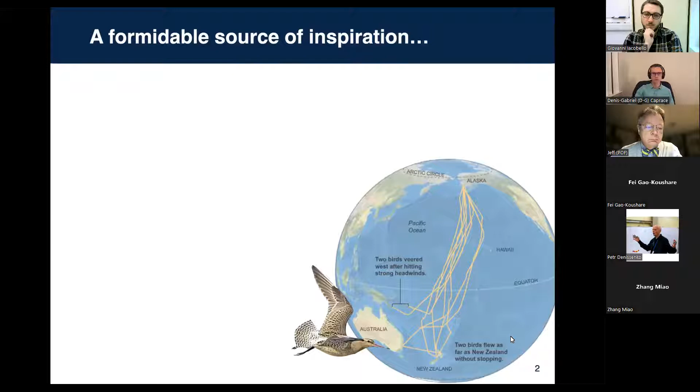Let me start with a very broad introduction, but I just want to point out how amazing nature can be, and how inspirational it can be for us as engineers when we try to come up with solutions. I'll point out a couple of facts here, like this little guy, the bar-tailed godwit, is one of the birds we know travels the longest distance, basically traveling across the entire Pacific Ocean on a single flight. It's pretty amazing in terms of flight performance. And you have other kinds of birds that do similar journeys, very long distances, like certain types of terns, and then swallows who can fly for an extended period of time, months, without ever landing. So all those things, when you look at that, it's really just amazing and mind-blowing how that can happen, and it's a great source of inspiration.

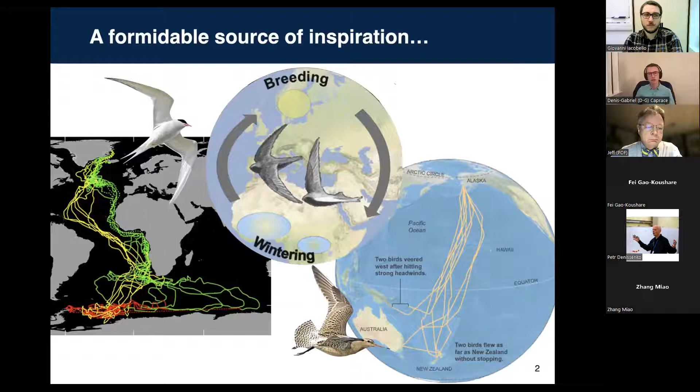Now, one of the consistent behaviors that we observe with birds is formation flight. Here we're talking about this organized way of flying where the birds fly in these V-shaped formations. That's been always kind of a source of wonder. So why do they do that? There's been many theories involved, but one of the theories that prevailed eventually was that they are getting an aerodynamic benefit by flying in this V-shaped formation. So we're going to look into that, but that's one of the things we think motivates formation flight for birds.

So it's been, of course, the topic of studies for a long time, first of all theoretical studies. I'm putting a list here, a very short list, just to give you an idea of the dates we're talking about. So early studies began at the beginning of the last century, but it's not until the 80s that we really get an idea of how much those birds can save energy when they're involved in formation flight. So here I'm borrowing this figure from Hummel in 1983. What he did is use very conventional aerodynamic tools, textbooks, theories, and also many assumptions - like in this study, it considers steady wings, so it's not even considering flapping flight or whatever. But he was able to come up with this measure of how much power the birds save when they're in formation, as a function of the lateral spacing between the birds.

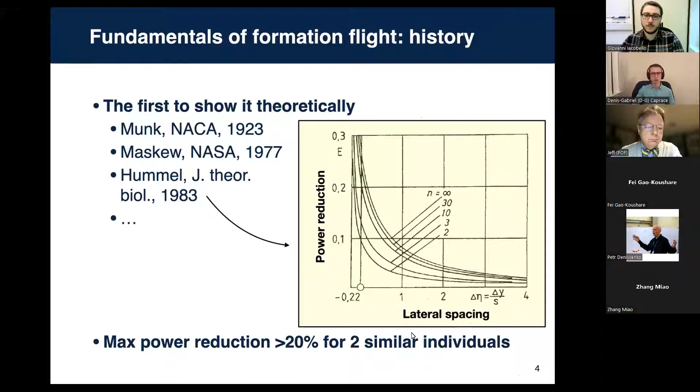To understand really where this power benefit comes from, it's way easier to look at a steady wing that flies at a certain velocity, and just because of Newton's third law, what you will eventually have is wake vortices developing behind the wing.

That's something you can visualize quite easily on an airplane, which has contrails here.

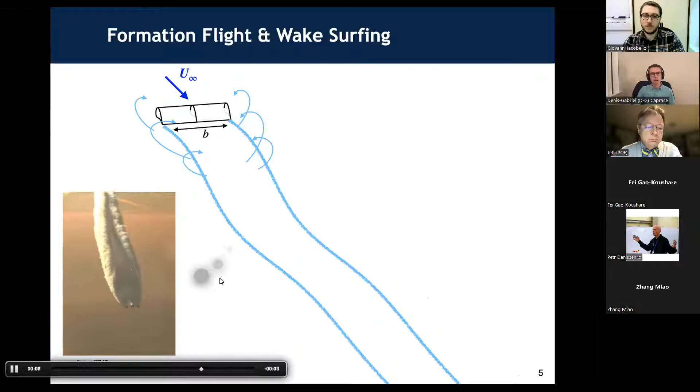What those vortices do is induce a velocity on their surroundings, with an upwash component outboard of the vortices and a downwash component inboard of the vortices.

What formation flight is about is really just flying into this region where you have upwash, and you can see that you have higher upwash velocity closer to the vortices. You can surf that region and get benefits from those upwash velocities.

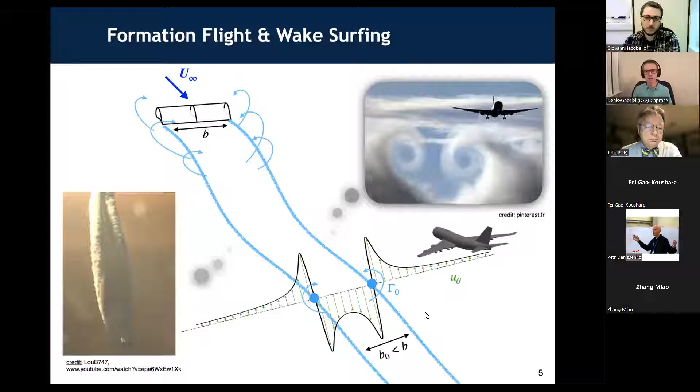What happens is, if you first consider an isolated airplane that travels at a certain velocity, you have a relative velocity to the air.

You can decompose the forces on the wing into lift and drag. But if you have an upwash velocity, you're changing that relative velocity a little bit, and the result is that you're tilting this system, so the lift vector is tilted forward.

So if you compare the two cases, when you fly in an upwash, the lift is tilted forward, and there is a slight thrust component to it.

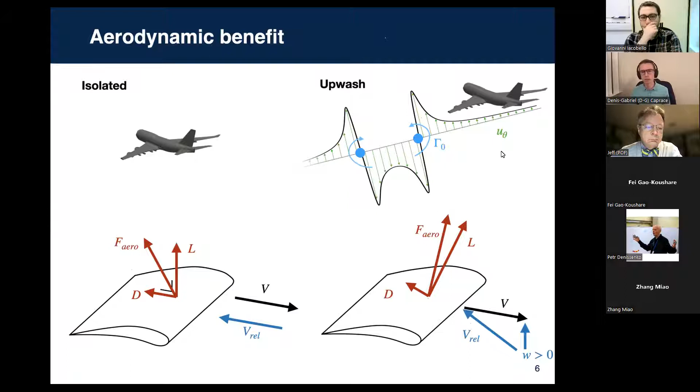That's all about formation flight. It's actually maybe not producing thrust, but reducing induced drag through the presence of upwash velocity.

So we know about the theory and how much theoretically could be saved, but then you can also just go fly and verify that number, seeing how much we can save with actual airplanes.

That's been the topic of numerous flight test campaigns, starting in the 90s, again with Hummel.

He wanted to verify the number he got with theory, and you can see he obtained about 10% savings during this experiment, pretty close to what he was expecting.

Then NASA did several experiments, starting with fighter jets, and you can see they reached pretty high values of savings, because they're really going into that region where you have overlap between the tips of the wings, as you can see here.

That's what gets you to very high saving values.

Another, in my opinion, quite interesting study was a more recent one where they used business jets, and one focus there was to try to understand

how turbulence affects the smoothness of the ride, meaning you don't want passengers in the airplane at the back to have too bumpy a flight.

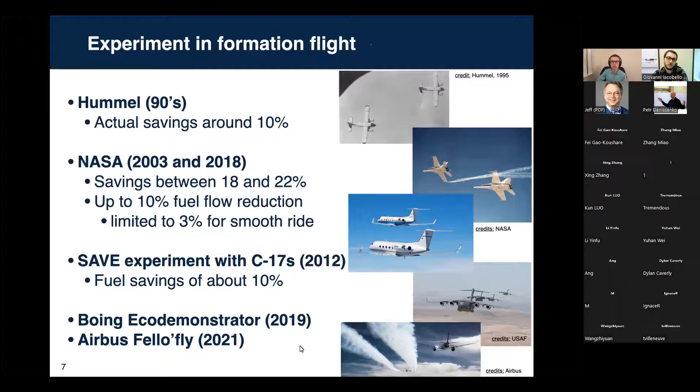So it's pretty good to see, and it's also pretty understandable when you consider the state of air traffic today, and in perspective with the current climate crisis, of course.

We're talking about 10% savings in drag, but that would also translate into fuel savings and reduced emissions.

When you look at certain regions of the airspace, like over the Atlantic Ocean, you have all those airplanes traveling roughly in the same direction, and it's pretty obvious to imagine a way.

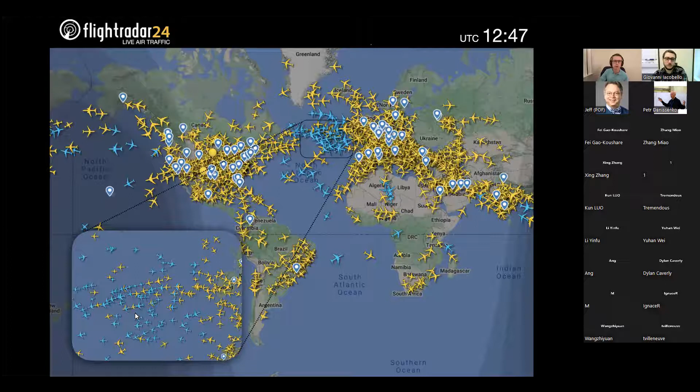I wouldn't say obvious, but you can imagine that it could be done, to group those airplanes in such a way that they can perform formation flight and get those benefits.

But there are still challenges that need to be overcome if we want to be able to really fly airplanes in formation. And the biggest one, of course, is safety. You want to maintain and make sure that both airplanes are safe at all times during formation flight.

One of the first things you realize is that you're not going to be allowed to fly those airplanes in what we call close formation flight, where you have one airplane and right behind it, a couple of wingspans behind, the second airplane, because the risk of collision is too high. What's more likely to happen is that you're going to fly extended formation flight, which involves a streamwise distance between the airplanes on the order of 50 wingspans. So we're talking about a couple of miles in spacing.

Now at those distances, you actually need to have a better idea where the vortices are located. And that's for two reasons. First, they're not visible at all times with contrails, so there can be situations with no contrails.

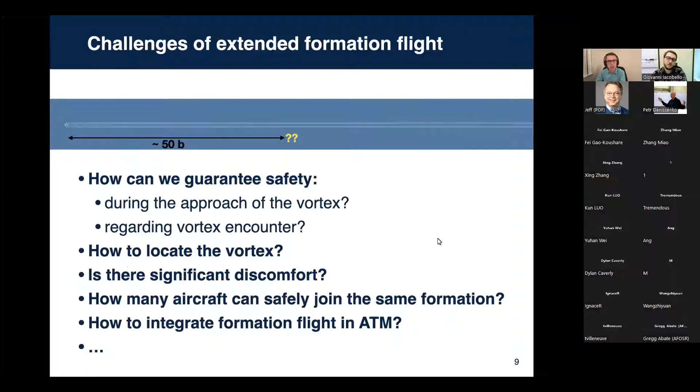There's a list of other challenges, but really we focus on wake sensing and locating the vortices here. So what I want to do in this presentation is go over a couple of the tools we developed in order to do that wake sensing, and then we'll go over some results.

I'll try to show you how the filter performs and what are the advantages and maybe limitations of those filters that we developed, and then I'll circle back to the aerodynamics of birds, because I want to compare that to what we have seen for airplanes. So let's start with the tools and modeling capabilities that we developed.

Just to make it clear, what we're trying to do here is determine the relative position between the follower airplane and the leader, and the position of the wake of the leader. I'm going to be talking about the leader when I refer to the airplane in the front, and the follower is the airplane at the back. You can see there is this quite long distance between these two airplanes.

So we're looking into those two quantities here. The thing is, there can be some factors that will influence the motion and the position of the vortices when we're talking about long distances like those. Those factors can be things like turbulence, but also interaction between the turbulence and the vortices, which can then develop fundamental instabilities that affect the position of the vortices over time.

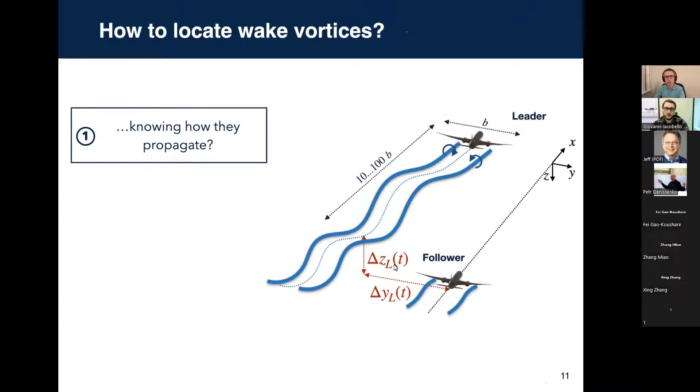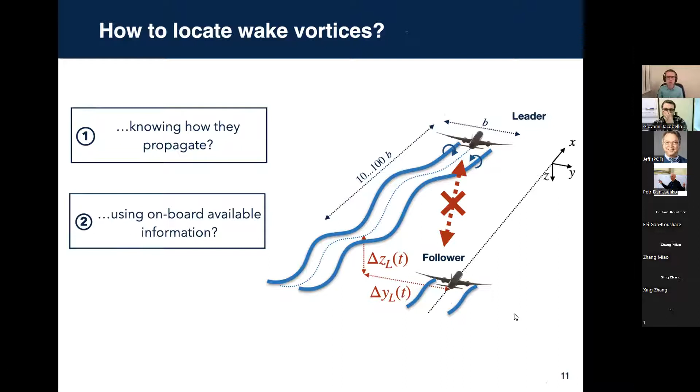That leads to a certain uncertainty, and that's why we think estimation can be a solution to better mitigate that uncertainty. Ideally, that's what we call wake sensing: the determination of those quantities. And ideally we'd like to do that without any communication between the airplanes, just because if you want to implement formation flight as soon as possible, you'd like to limit the number of additional systems you need on the airplane to perform formation flight.

But then when you know the relative distance between you and the wake, as the follower you can turn on what we call the tracking. That means using your autopilot to fly constantly at the optimal position in the wake that gets you the maximum benefits you expect from the wake vortices. So we're going to talk about sensing when we try to determine the position of the vortices, and then tracking when we actually fly using those estimates in order to maximize the benefits of formation flight.

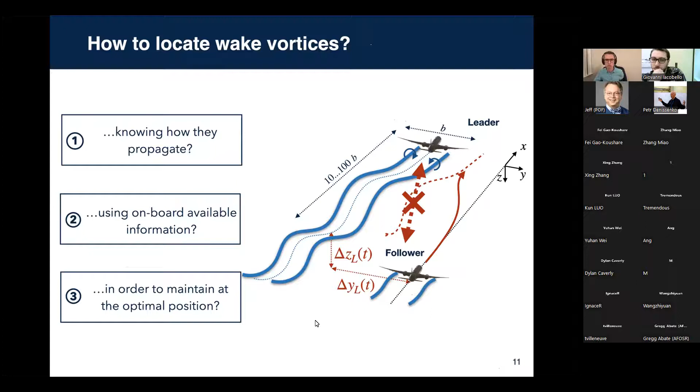So we're trying to sense the wake. Then the question is, what sensors do you need for that? One thing you can think of straight away is using relative position, and that works pretty well when the airplanes are in close formation flight, close apart from each other. But because of that uncertainty in the propagation of the wake that I was talking about, it lends itself a little worse for extended formation flight.

That's something we will not consider in this work. Another idea is to measure the vortices directly, which you can do through LiDARs, for instance. There have been works in the literature with that, but again, that requires an additional system. And if you want to install that on an airplane, you get into certifications and things like that, so it will probably take some time before airplanes are equipped with that system.

For that reason, we're not looking into that. Instead, what we're going to be seeing in this work is the last two options. The third one still uses an additional system, but takes less volume from the plane, let's say. That would be using some sort of distributed measurements across the wing. Instead of sampling an entire 2D section of the flow, you can have a couple of probes that give you an idea of the state of the flow around you, and from there you can determine the position of the vortices. That idea has been used previously in similar studies.

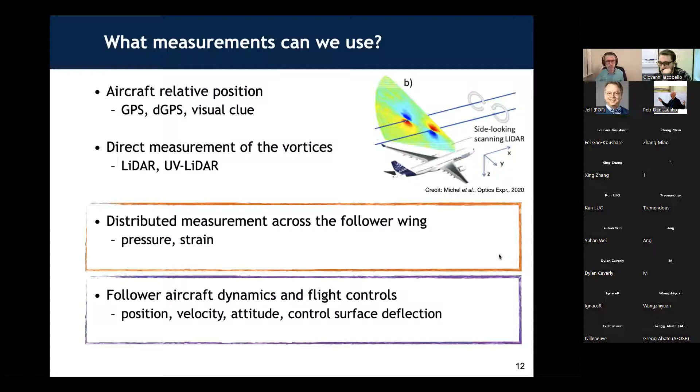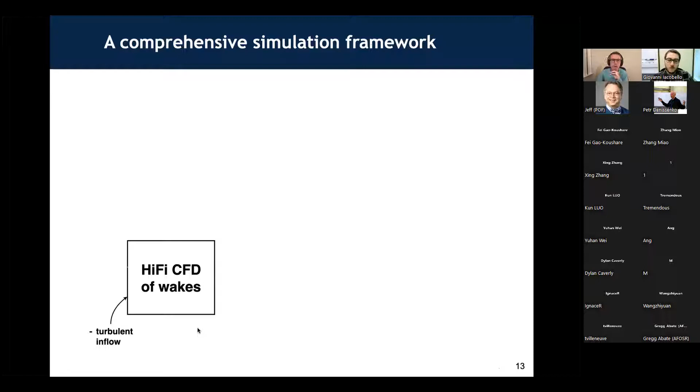We'll need a simulation environment to perform those investigations. Let me go over the main pieces we need. We'll have a high fidelity CFD solver, which is one of the main building blocks of this environment, because we want to capture the physics of those wakes. As I mentioned, you can have interactions between turbulence and the vortices, and we really wanted to have that kind of fidelity to make sure the propagation of the wake is accurate, with turbulence as a source of perturbation and noise in the estimation.

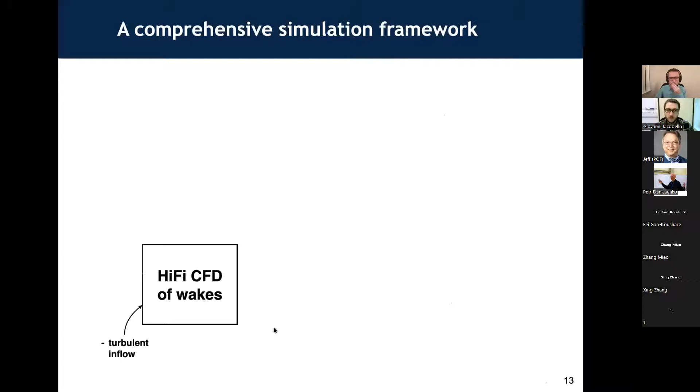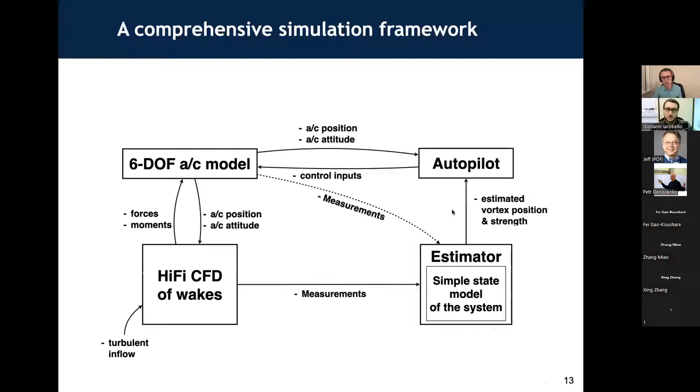Now the CFD is coupled to aircraft models. Those are 6 degrees of freedom models, which basically allow us to integrate the position of the airplanes as a function of time. From those bricks, we take measurements. The whole idea of the estimation strategy is taking measurements out of those two, feeding that into an estimator that we still have to determine and define, and then you hope that out of that estimator you can get the position of the vortices and their strength. That's about sensing, and then for tracking, you can feed that back into an autopilot that will control the airplane and make sure the follower stays constantly in the right spot.

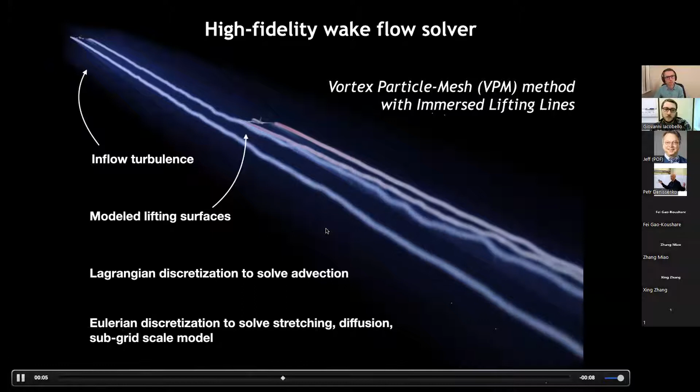Then you have the aircraft model. It's again a 6 degrees of freedom model, meaning we can have the full dynamics of the airplane. We have control surfaces, an autopilot, and all that is integrated into the high fidelity CFD solver.

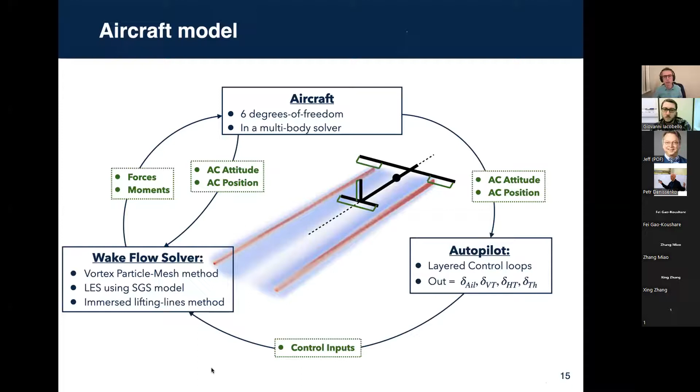Now comes the cornerstone of this estimation, which is the estimator itself. Before I go into this, I'd like to mention there are several ways of attaining that goal of determining the position of the vortices, or at least finding the right spot in the wake where you want to be in order to maximize the benefits. Another thing you can think of is deep learning - you could teach an aircraft how to fly into a wake. That's something I won't talk about today, but I have a couple of backup slides if someone is interested.

The advantage here of the estimation based on estimation theory and Kalman filters is that you will estimate the position of the vortices, but you will also have a degree of confidence in that estimate. And we think that is really an advantage with respect to safety. So the way it works is as follows.

Just a refresher on Kalman filters in general. You have an actual system that you can take measurements out of. Those measurements are this Z vector here. They come from an actual airplane, or in this case, from the CFD and the high fidelity aircraft model. They come into the Kalman filter, where I have a state vector and a state representation of the system through a surrogate model.

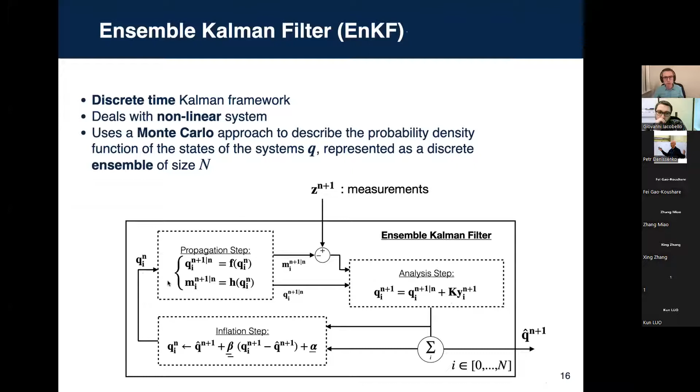So now we know about the estimator. What we still need to determine is what we put in this box - what's going to be the surrogate model we use. The surrogate model should rather be something quite simple and also computationally efficient, because if you want to do real-time sensing, you need to be able to propagate that model often, in a real configuration.

This model here is based on the Prandtl lifting line for the aerodynamics. So we have a couple of lines that represent wings, and they are influenced by two infinite vortices - actually regularized point vortices - but those vortices have an induced velocity similar to the actual wake.

And so they influence the aerodynamics of the Prandtl lifting lines. And then on top of that, we still have our dynamics - the 6 degree of freedom dynamics of the airplane that we can integrate, and the autopilot. So that's the surrogate model.

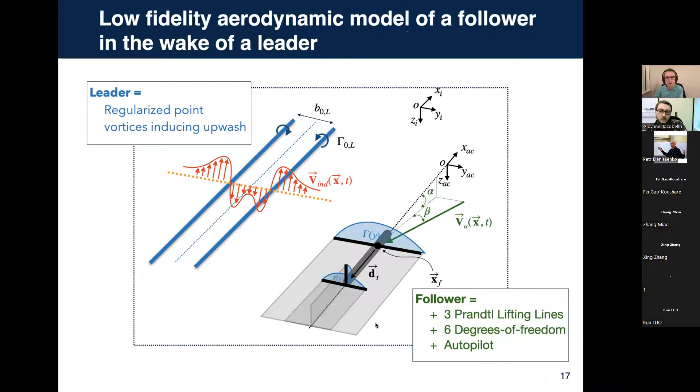I can skip that probably. I just want to summarize here the entire strategy. So we start with the actual system, which is what I presented in the beginning. It has the CFD simulation. It has the aircraft dynamics through the 6 degree of freedom model and the autopilot. That is what we hope we could swap with actual airplanes flying in reality.

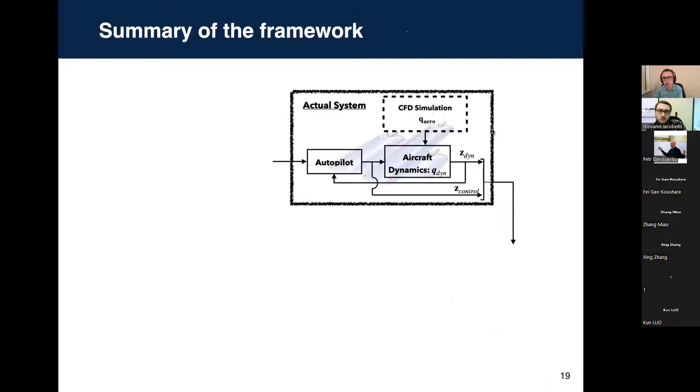But in this context, we take measurements out of that and input that into the Ensemble Kalman filter. The Ensemble Kalman filter has this surrogate model in there, and it performs the estimation, so that in the end we have an estimate for the position of the vortices, the relative position, and their strength. And then eventually, as I was saying, when you do tracking, you can feed that back into the system and provide that information to autopilots in order to follow the wake vortices.

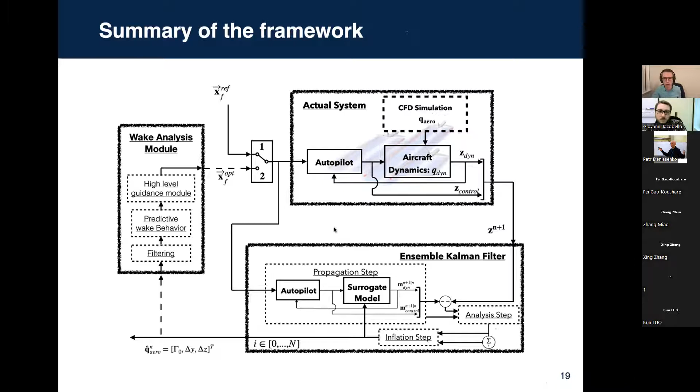Okay, that's it for the modeling. Now what I want to do is show some results, and we'll do it gradually. I'll start with very simple configurations and simple systems, and then I'll add more complexity towards the end.

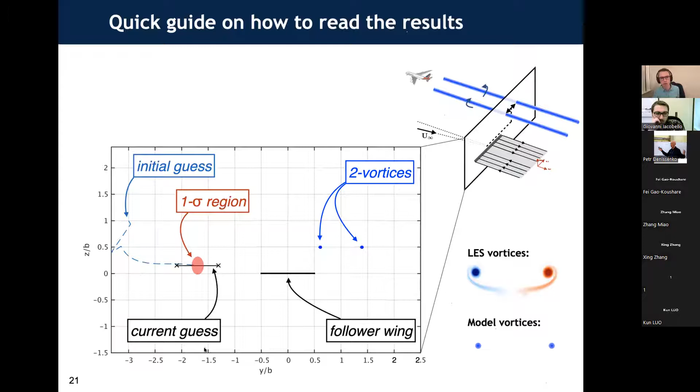On the left-hand side here, it's everything related to the current state of the filter. You have the current guess for the position of the vortices, materialized with the two crosses here. You have the history of the estimated position. And then the red area is the confidence interval that the Kalman filter provides. Basically, the smaller that region is, the more confident you are in the estimation you're currently doing.

So let's start with something very simple. We're going to look at a follower airplane that actually has no dynamics. I turned off the autopilot, turned off the dynamics. I'm just fixing the position of that airplane in space. It's located right next to the vortices that it's trying to locate. And I'm using for this one those distributed measurements across the wing, which give me a sense of the state of the flow around me. That's the only measurement I'm using here.

So if I turn it on, you can see that the filter actually works. It converges to the position of the vortices, which is great. Now, that's not really new. That has been shown in the literature before that it can work.

Now, what's novel here is the use of the Ensemble Kalman filter. And I was talking about nonlinearity and robustness. What happens is that I can put my initial guess for the system pretty much anywhere in that 2D space, and the solution will converge to the actual solution. That was not the case, for example, in previous studies that used different types of filters.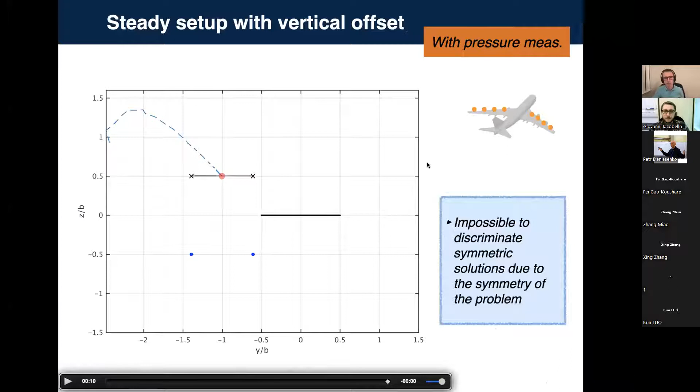So that's going to cause an issue here. And so we can try and solve that issue.

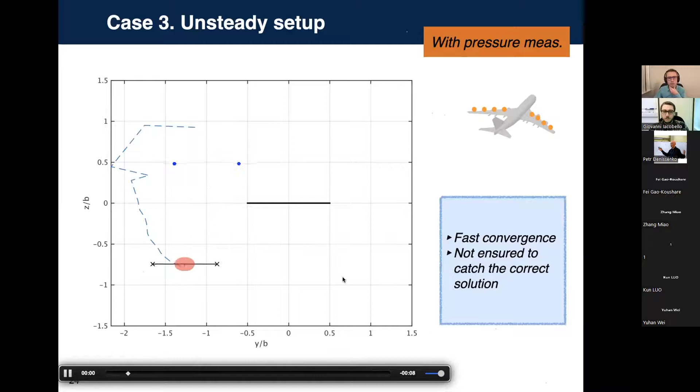One idea that there was in the literature is that if you add unsteadiness in the signal that you're trying to estimate, you're improving observability. That's actually the case here because the filter converges pretty fast to a solution, but still here, because of that symmetry, you're not able to guarantee that the solution converges to the actual solution that you look for.

Another idea that we had here is that if you add dynamics now on the follower airplane, you might also help the estimation. And that is because if, let's say I am converging to the wrong solution, then if the follower moves a little bit, it will get closer to one solution and further away from the other solution. At some point, the filter will realize something is wrong and it will switch to the actual solution. And that's exactly what just happened here, if you paid attention. So by moving the follower a little bit, I was able to converge to the actual solution. So there is this idea that the dynamics of the follower airplane itself can help in improving the quality of the estimation.

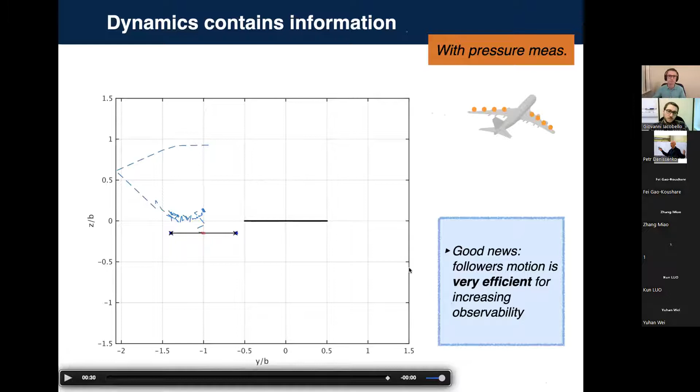Now, unfortunately, there's no free lunch. And if you really want to make sure that you get rid of that symmetry issue I was mentioning, you will have to add a new measurement. Just to make it clear, what happened here was that if you have vortices located somewhere in space, they will have an influence on the main wing of the follower, but that influence is going to be the same no matter if it's located above or under the plane at the same distance from the symmetry plane.

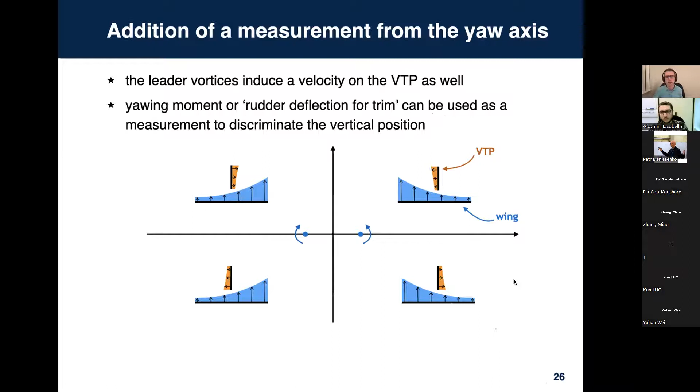Now, if I add another measurement, let's say using something that happens with the vertical tailplane, and that could be a yawing moment, for example, or the deflection of the rudder, or something that has to do with the lateral dynamics of the airplane, then what I'm getting is a different configuration in each quadrant of the space here. So that now means that if I add this measurement, I should be able to discriminate those solutions and make sure that I'm getting the right solution.

And so if you do that, actually, yes, it works. You can see that the estimation gets to the right solution and gets locked onto it. What happens here is that I turned on both a simplified dynamics of the follower, so you can see that the follower wing responds to the presence of the vortices, which helps the estimation. But also I have this additional yaw measurement that I'm using to discriminate between the solutions, and then I'm getting a correct estimate over time.

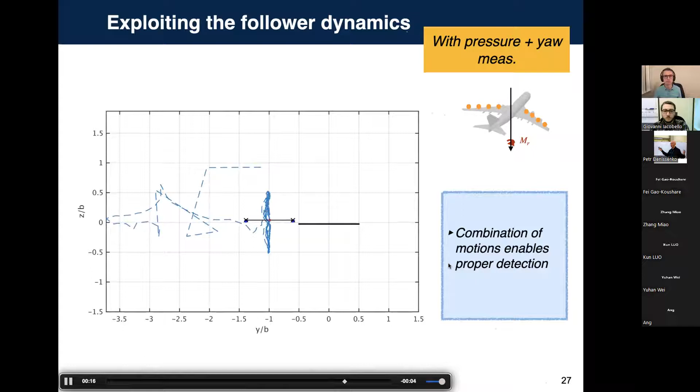So those were relatively simple cases, but they were all using additional sensors distributed over the wing. The big question we had is: can we use only the dynamics of the airplane, meaning only measurements that you already take on the airplane, in order to perform the estimation?

And that's what we're using on this slide here. It's actually a jump in complexity, not only because we're using those dynamics measurements, measurements from the dynamics, so position, velocity, also angle of attack, side slip, and the control surface deflections.

In this case, the dynamics of the follower airplane is of course turned on because I want to take measurements out of it. But we also have the autopilot, which for this case controls the airplane so that it flies in a straight line. That's why you can almost not see it moving here.

And the flickering at the back, if you can see it, is actually the turbulence that we have in the simulation. That's a natural source of noise for the entire estimation process, because it generates those instabilities that we saw in the wake of the leader.

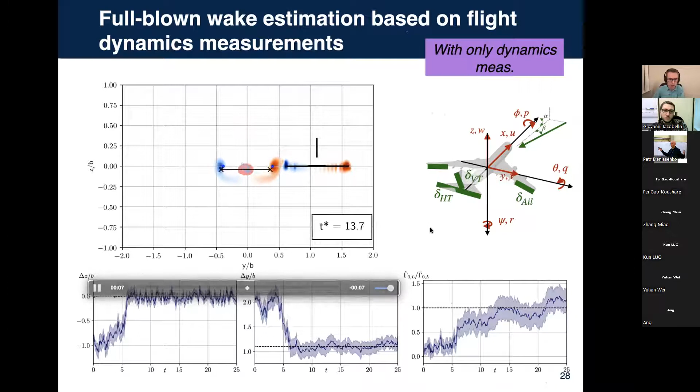Now that was sensing, and the last thing I can do is turn on the tracking. So if I have vortices that are moving, then I can instruct the plane to follow those vortices and use the autopilot for that. That's what this little video is showing.

And actually, in this case, it also helps the filter because, again, you have dynamics going on with the follower, which improves the observability, and also you stay closer to the vortices at all times, which helps you have a higher confidence in the estimate at all times.

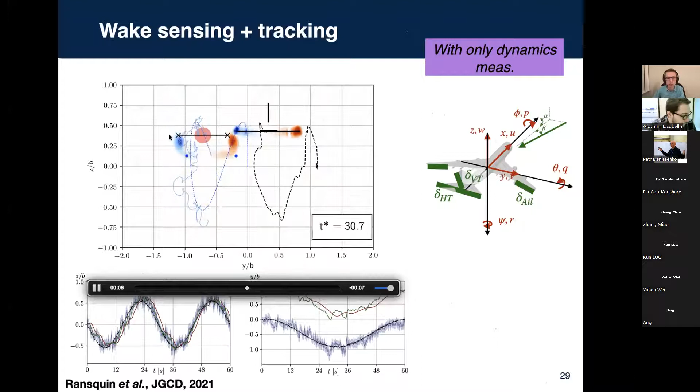So let me now share some of the lessons we learned in this entire process, and that was, let's say, a learning process for us at least.

So there was this ambiguity in the position of the vortices, and due to that symmetry I was mentioning before, there's another kind of symmetry in the system, which I didn't mention so far: if you have a strong wake located far away from the follower, it actually has a very similar influence on the follower as a weaker wake that would be closer. So you have that trade between the lateral position of the wake with respect to the follower aircraft and the circulation of the wake vortices.

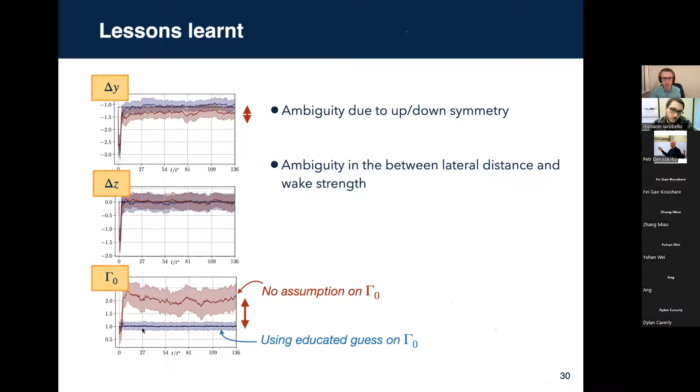So that means that practically, if you want to implement this solution in actual airplanes, you would need some sort of way to determine what this circulation can be. That could either be through communication between airplanes, so you would still need that, or maybe just a gross estimation or an educated guess of the mass of the airplane by looking up its type, for example, might be enough to have that little information we're missing in order to make sure the estimation does the right thing.

And the last item here I want to mention, which is one of the limitations of the filter, is that the surrogate model we use inside the Kalman filter needs to be relatively accurate in reproducing the natural dynamics of the follower airplane.

And that is because, when we use only the dynamics as measurements, what the filter is actually doing is discriminating between what is the natural dynamics of the airplane without influence of the vortices, and what part of the observed dynamics is due to the wake vortices. So if you have biases and noise in the surrogate model, then the filter might not be able to identify what is the influence of the vortices.

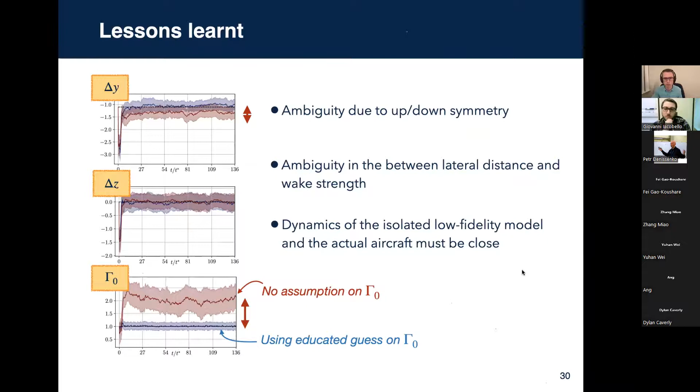So that's all about wake sensing and tracking. Let me now conclude by briefly showing you the wakes of birds.

The question you can ask after seeing all this for airplanes is: birds have been doing that forever, so how do they do it? Do they need that kind of sensing? How are they able to fly in formation?

The first thing to realize is that the wake of a bird is slightly different from the wake of an airplane, in that you're going to have vortices, but they're not going to be straight vortices as in the case of the airplane.

Instead, what you get is oscillations and variation in circulation depending on the position, because the bird is flapping. There was also a theory that depending on the gait of the bird, how the wings are flapping, you can have a wake made of vortex rings or something more continuous.

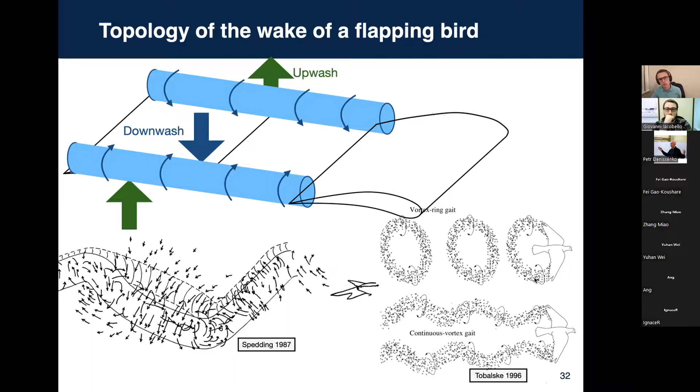So the idea is that we can use that CFD simulation tool I mentioned to study that and perform a simulation of a bird to see what the wake looks like. That's actually the work of my colleague Victor for his thesis, and he got to this solution, a simulation of a bird.

There's actually a lot that goes into this, because the aerodynamics is through the CFD tool I presented, but then there is also a quite complex biomechanical model of the bird that includes the bones, muscles, tendons, and all that kind of stuff.

Also something interesting here is that the bird is actually in trimmed condition on average, meaning the lift equals the weight and the thrust equals the drag on average. So there was a lot of effort going into controlling that bird and stabilizing it in the simulation.

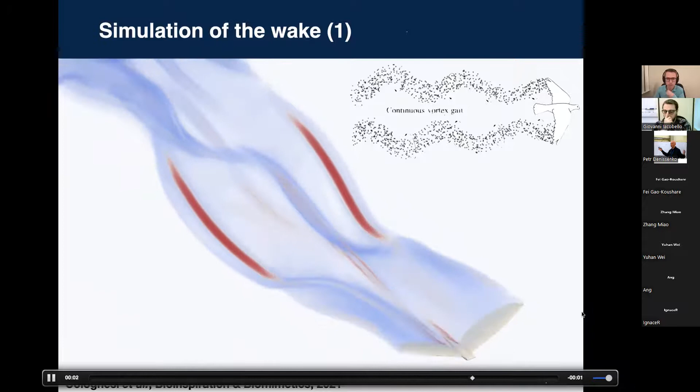I have references about the models involved, and I can show those at the end.

But then when you have that wake, you can compare it to what you know from airplanes, and you can see that there are regions of the wake that look like what you'd expect, with strong tip vortices, corresponding to the moments when the bird was producing most of its lift. But there are also other regions that look a little different.

Now, the good thing about this simulation is we believe it's physically correct, in the sense that the vorticity field is still solenoidal, so all the loops in vorticity are closed. Now we can use this wake for more investigations, and one of them can be formation flight.

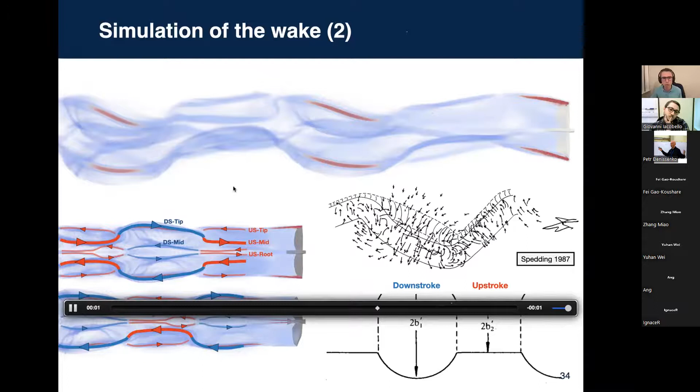I just want to show you this, which is interesting in the sense that now you have two birds. The bird at the back is again flying in trimmed conditions, at equilibrium, and you can see it's flapping its wings in phase, meaning that if you look at the tip of its wing, the tip is actually following the path of the tip vortex of the bird in front — and that has been shown to actually happen in nature.

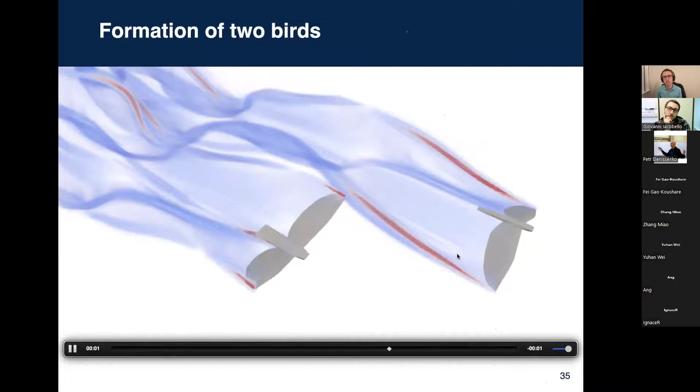Some species of birds know that doing so, and adapting their flapping frequency and phase to the vortices coming out of the leader, will maximize the aerodynamic benefits. So they have to have a way of sensing the wake in order to adapt.

But what I want to point out here, in terms of sensing, is that this configuration has all the factors I mentioned were beneficial for sensing. We have a lot of unsteadiness and three-dimensionality in the wake of the leader, which has been shown to improve the observability of the wake, and also the follower bird has its own dynamics — those two factors may help in sensing.

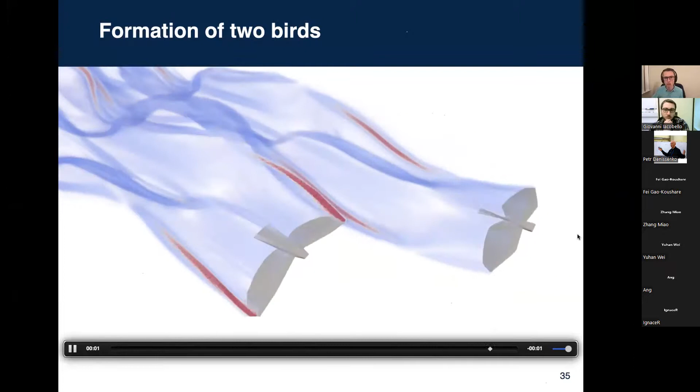And also, they're flying in close formation, so they can most likely use their vision to position themselves.

So if you're interested in those results, I invite you to look into publications. This one is not published work yet, but look up the work from Victor and follow him on ResearchGate, or if you want to get updates, look for that.

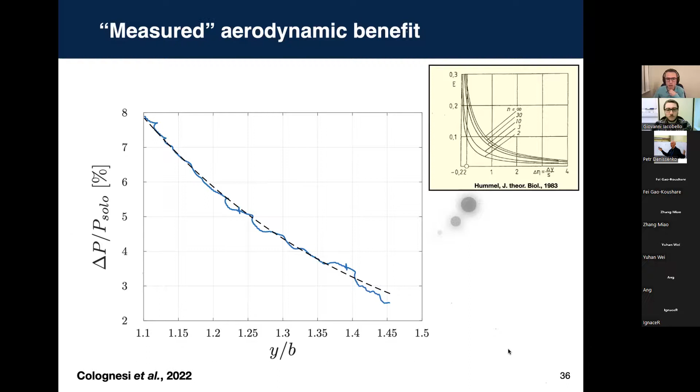And I'll just finish with a brief conclusion. So we've performed wake sensing using different types of measurements. We've been able to show that the unsteadiness in the wake and the dynamics of the follower are factors that help in increasing observability, but also we need to be careful about what measurements we use. And we demonstrated that the use of the follower dynamics can be sufficient to perform wake sensing for formation flight, as long as you have an accurate model for the dynamics of the follower airplane.

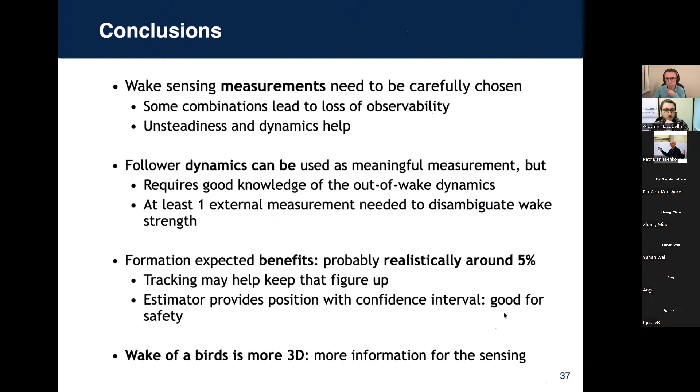And then in terms of the benefits of formation flight, we didn't bring any new elements here. So I think realistically, we're talking about 5% drag reduction for the follower airplane in formation. Something that we brought in this study, though, is this capability of providing a confident estimate of the position of the vortices, which is something you need when you want to be able to safely fly in proximity of those wakes.

Yeah, that's a good point. My understanding would be that if you use a sensor and then you lose information at some point, because you lose communication, for instance, as you mentioned, you can still perform estimation using the last best measurement that you had. In this case, let's say you rely on that communication to have additional information about the strength of the vortices that are coming.

So let's say you were exchanging, for example, the weight of the airplanes through a communication link. If you lose that link, it's not a big deal, because that weight is not going to change by very much over time, so it shouldn't be an issue. Now, if you're telling me that at some point you lose half of your pressure sensors that you were using for the estimation, then I don't give a lot of confidence in whatever estimation comes out of the estimator afterward.

Now, adding measurements in real time, we didn't consider that. I guess it depends on the type of measurements that you're thinking of, but the way we implemented the filter and the surrogate model, it's kind of the same thing. You would have to have an initial guess for the measurements that you don't have in the beginning, and then at some point during the estimation, they turn on, and the filter adapts.

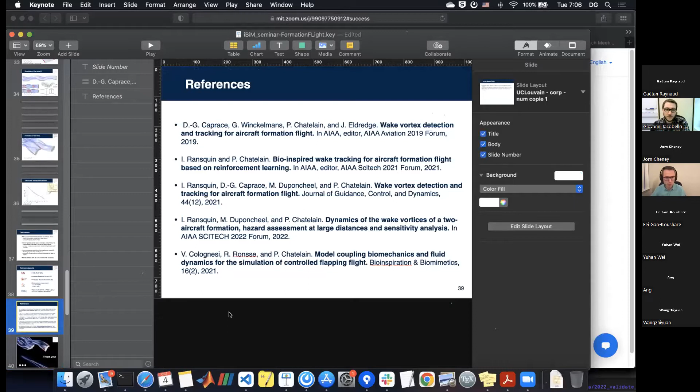Sure. Let me just pull this out, we have a publication on that. And of course, I'm happy to have a separate discussion with whoever is interested. Let me try to go here. So you can look up, which one is it, I think it's going to be this one. It's an AIAA paper, SciTech 2021. It's still kind of preliminary work, but it shows at least one way of doing the estimation using reinforcement learning. Thank you very much.